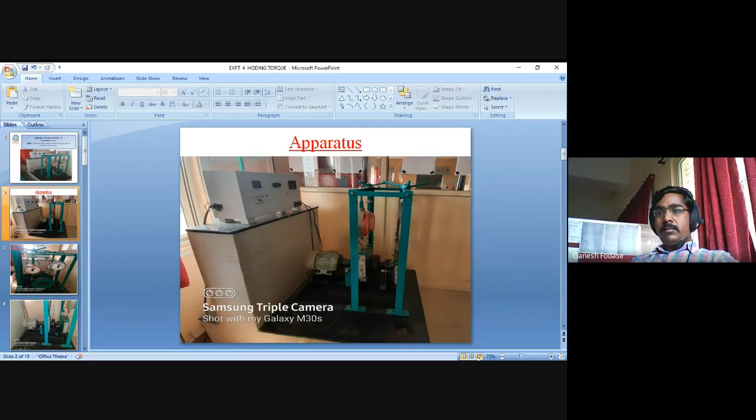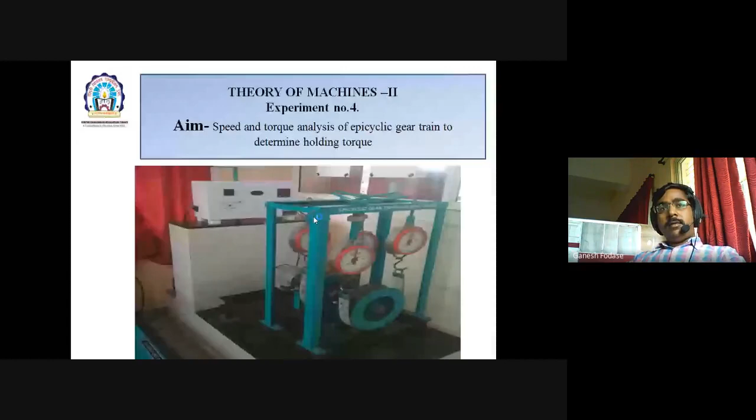Today we'll discuss a practical on epicyclic gear train. The aim of the practical is speed and torque analysis of epicyclic gear train to determine holding torque.

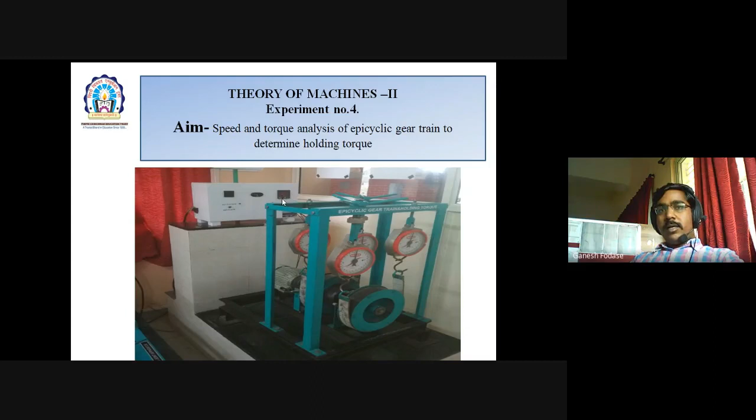This is our setup. It consists of different parts like a display. Other parts I will show you in next view. This display is there to show you or to obtain readings like RPM, voltage, current, and there is input and output switch.

This is side view of the setup. I already told you this is display. Here it consists of a motor. These parts I will show you in more detail in one more view.

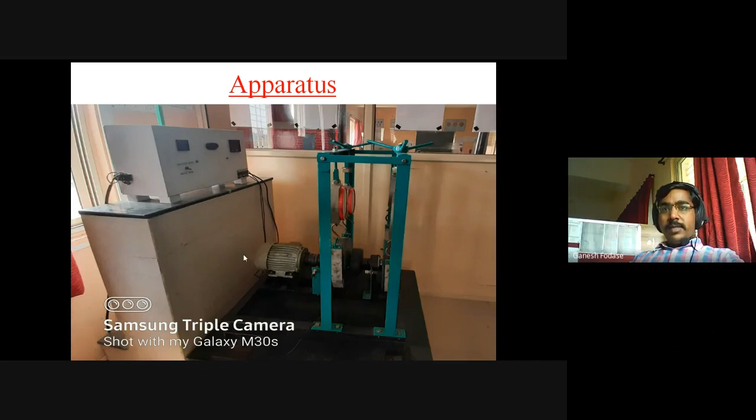This is front view of our setup, and in this front view it is clear we are using two pulleys. Let's say this will be a pulley mounted on ring gear shaft or output shaft. This is carrier pulley which is connected to two arms on which planets are rotating. So this is planet carrier pulley and this is output gear pulley.

On this pulley is rope brake dynamometers. You can see these spring balances. These rope brake dynamometers are used to determine torque acting on each pulley. So this is front view.

In side view, now I will show you each part in detail. The power is transmitted or given by motor through motor to sun gear. You can see this is our epicyclic gear train.

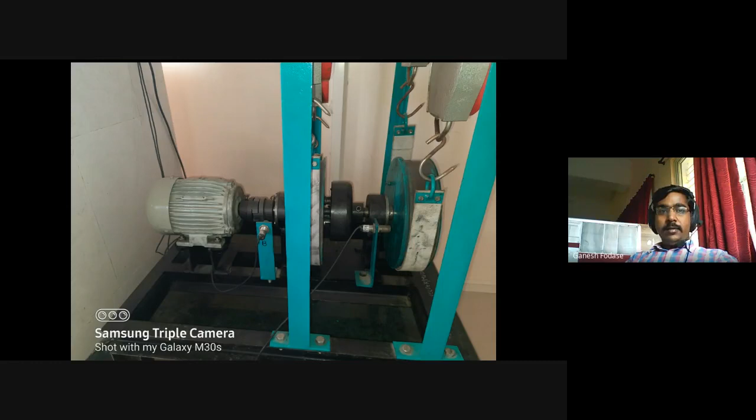So here it is, this will be a epicyclic gear train. Inside this there is epicyclic gear train. At the center there is sun gear, and around the sun gear two planets are there, and these planets are in mesh with this ring gear.

So you can see this sun gear shaft. This sun gear shaft is connected to motor through coupling and bearings. This is coupling and this is a bearing to support the shaft, while coupling is used to connect the motor shaft with a sun gear shaft.

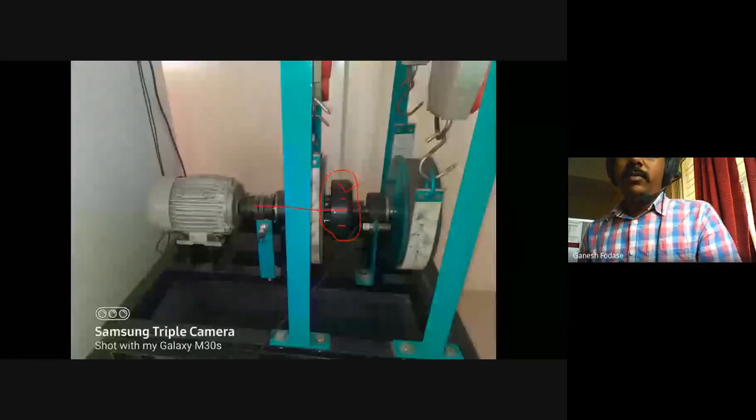Now you can see here from this planet carrier or from this epicyclic gear train, three shafts are coming out. So here it is, one shaft. You can see this will be one shaft. Another shaft is here and one more is here.

So the central shaft is sun gear shaft. These two, I'm saying these two, this one and these two are the arms on which planets are rotating. And these two arms are connected to this pulley.

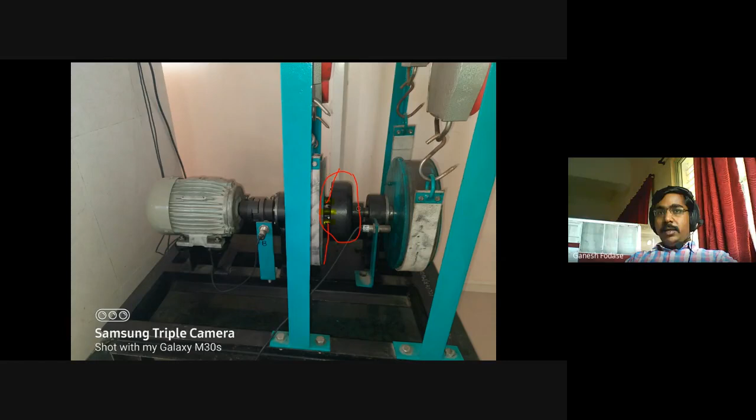In this pulley, you can see in the side view, in the front view, this pulley is connected to two arms which are shown here. So if these arms are rotating, these pins are rotating, which is rotated by sun gear. If they rotate, this pulley also rotates. And if this pulley is held stationary, means these arms are stationary, then power is transmitted from sun gear to planet and planet to ring gear.

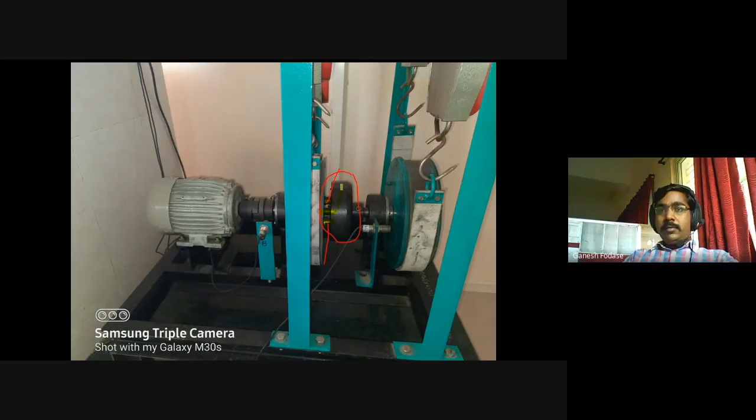So this is our ring gear. This black color outside portion is a ring gear portion. So this is our ring gear, and you can see this ring gear is connected to output shaft with the help of this arrangement. So ring gear is connected to output shaft, and on output shaft there is an output pulley.

So this is the input from motor. This is output connected to ring gear, and this is planet carrier connected to arm. Now if we can fix any one of this element, that is either ring gear or arm, so if I fix this planet carrier by fixing this pulley, so to apply load on these two pulleys.

Arrangement of rope brake dynamometers is used. You can see the spring balances. So we can apply load on this pulley as well as this pulley by using this. With this lever, we can arrange load, we can apply load on these pulleys, that is either on planet carrier pulley or output pulley.

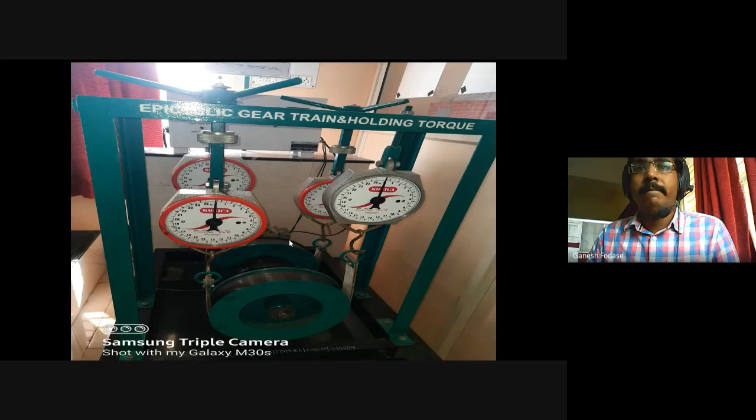So this is all a setup. Now what this epicyclic gear train consists of in detail, you can see at the center there is sun gear, and around there are two planet gears, where these two planets are meshing with ring gear. This is also a schematic diagram I drew.

Motor current transmitting power to sun gear through input shaft, in between coupling and bearing is there. Bearing is used for supporting the shaft, while coupling is used to connect the motor shaft with a sun gear shaft. Sun gear mesh with planets.

There are two planets, and these planets are rotating over a pin, and these two pins or arms are connected to a planet carrier pulley, while this internal gear is connected to output shaft. A bearing is there to support the shaft, and over that output shaft, output pulley is there. While spring balance arrangement, the rope brake dynamometer arrangement is there to calculate the torques.

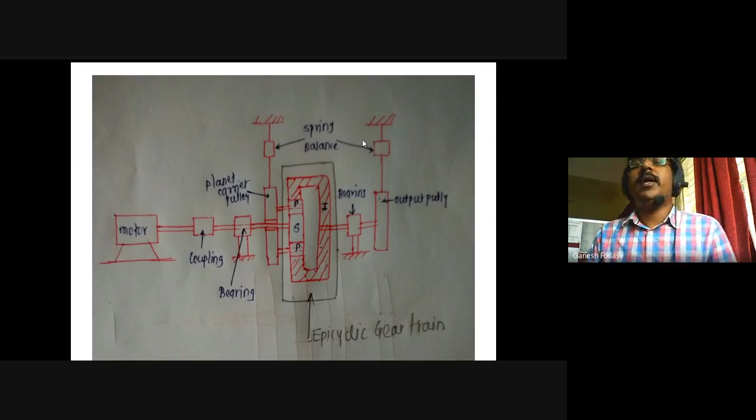This is our overall setup. Now, what theory is required to analyze the speed and torque?

We must know in epicyclic gear train there are three types of torques basically: input torque, output torque, and holding torque. We can say the element which is held stationary, the torque acting on that element is called holding torque. So there will be input torque, output torque, and holding torque in a epicyclic gear train.

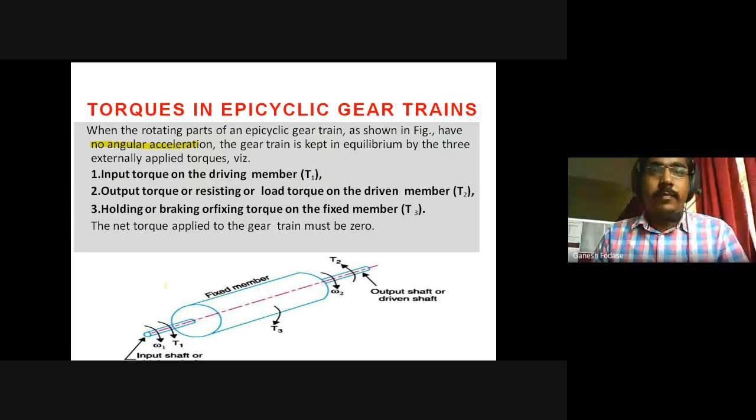And if you assume that all these elements are rotating with constant angular velocity, means there is no angular acceleration, then we can write the net torque acting on this gear train must be 0. So if these elements are rotating with constant angular velocity, then net torque will be 0.

External torque will be 0. Hence our equation is T1 plus T2 plus T3 is equal to 0. This is one of the important equations for torque analysis.

Another assumption is that we neglect friction. So if we neglect friction, the net kinetic energy dissipated by the gear train must be 0. Hence one more equation: T1 omega1 plus T2 omega2 plus T3 omega3 is equal to 0. But since the third is a fixed element, omega3 is 0, and hence our final equation is T1 omega1 plus T2 omega2 is equal to 0.

That is, input power plus output power is equal to 0. We can also write input power is equal to output power. So with equations 1 and 4, we can analyze epicyclic gear train problems. This is about torque analysis of epicyclic gear train, theory of torque analysis.

One more interesting thing here: by using equations 1 and 4, we can write T2 in terms of T1, and T3 in terms of T1 and T2. We can see this equation here.

If the angular velocity of input shaft and output shaft, using 1 and 2 for input and output, are not equal but in the same direction, then torques acting on input shaft and output shaft will be in opposite direction. While if the angular velocity of input and output shaft are in opposite direction, meaning having a negative sign, then this will get cancelled, so torque in that case will be in the same direction.

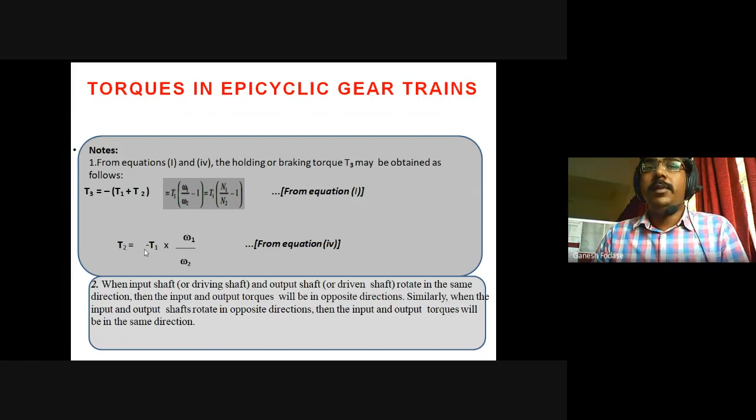I already explained the setup, but we'll see the specifications. The sun gear has 14 teeth. There are 2 planetary gears, each carrying 21 teeth, while the internal gear has 56 teeth. These 2 pulleys have a diameter of 260 mm with a 6 mm thickness belt.

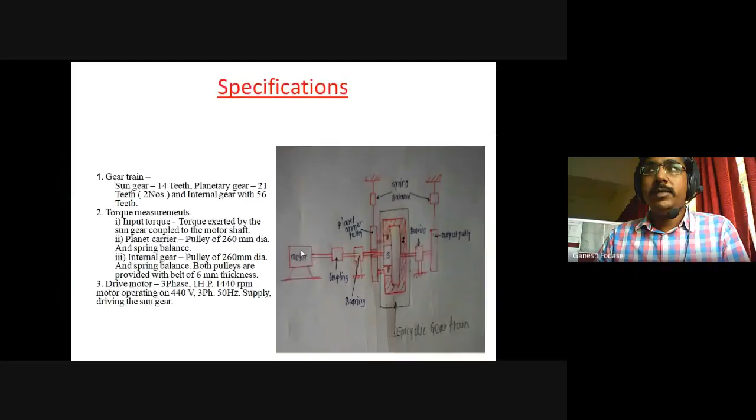This motor is 1 horsepower and there's a 3 phase motor. These are all the specifications of this epicyclic gear train.

What precautions do we have to take? Different precautions, like we should not load this motor above 1.9 ampere. Before starting the experiment, we should provide proper lubrication to all gears and bearings. And one more thing: when you turn the switch on or off, at that time the load on both pulleys, that is input pulley and output pulley or planet carrier pulley, must be 0.

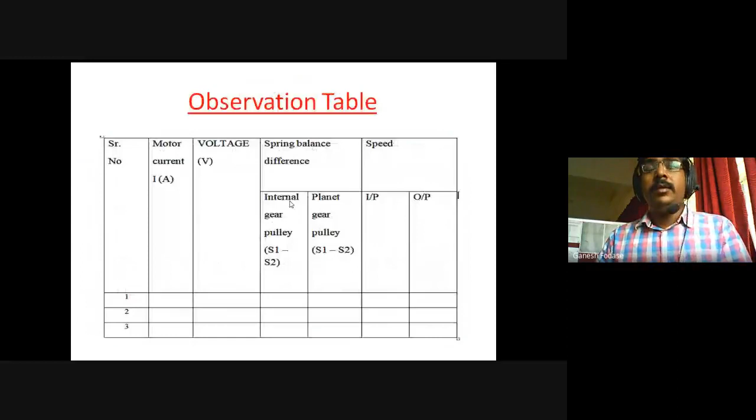Another precaution I will explain in the demonstration. Now, what do we have to find out? We have to find input torque, output torque, and holding torque.

For finding input torque, we require the torque acting on the sun gear. So for sun gear, input power is equal to 2 pi NT, or power is equal to 2 pi NT by 60. So torque is equal to power into 60 upon 2 pi N.

The basic equation is that V into I is nothing but power. So input power is equal to 2 pi NT upon 60. So to find out input torque, that is torque acting on sun gear, I require voltage and current to find out power, and RPM of the input shaft, as well as to find the torque on the planet carrier.

As I explained, the rope brake dynamometer is used. So here it is basically the spring balance difference of the planet carrier into 9.81. Why 9.81? Because this difference is in kg, multiplied by radius. The radius, as I already told you, is 260 mm diameter pulley plus 6 mm thickness.

So both side thickness is 12 mm, so it is 260 plus 12. Likewise, the net force, that is net spring balance difference into radius, gives you the planet carrier torque. Similarly, spring balance difference of the internal gear into radius multiplied by 9.81 gives you the internal gear torque or output torque.

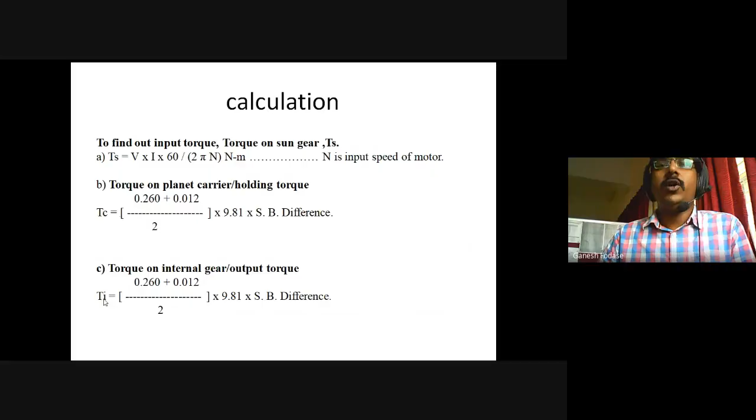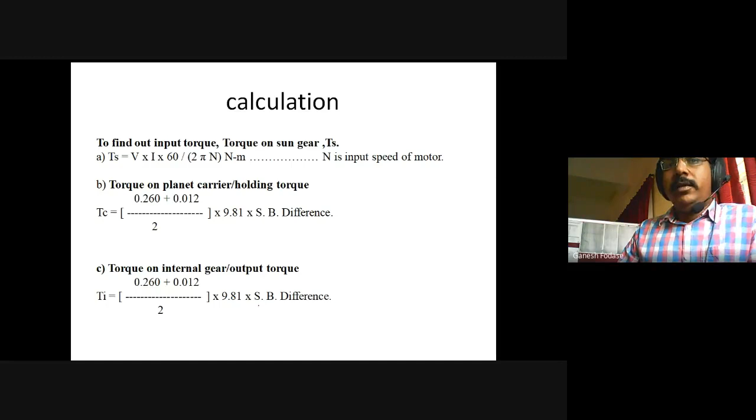So to find output torque, holding torque, and input torque, we require spring balance difference on the planet carrier, spring balance difference on the internal gear. Dimensions are already known, radius and thickness of the belt is known, as well as we need to find V and I, the input power, as well as input RPM.

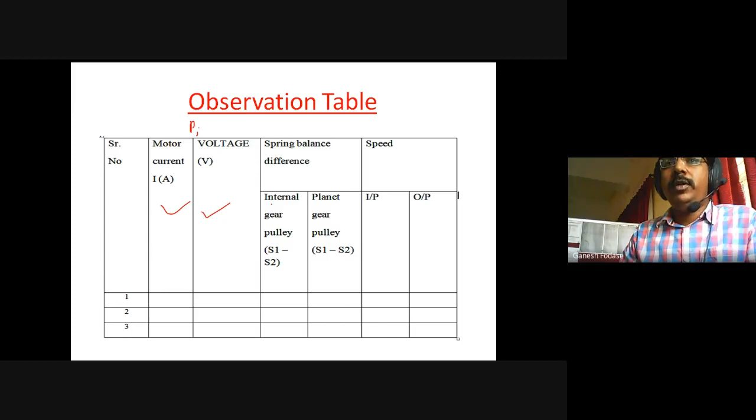And for this, our observation table is input power. To find input power, we have voltage, and we have to find voltage and current supplied to the motor. Then spring balance difference to find torque on the internal gear pulley and torque on the planet gear pulley. At the same time, we have to find input speed and output speed.

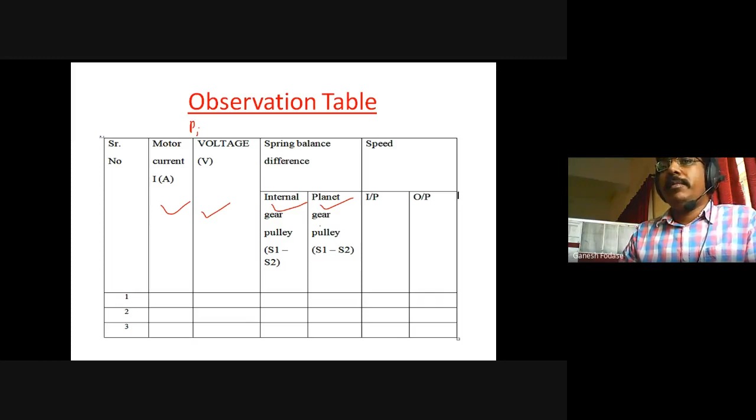So if we find the spring balance difference, then multiply by radius, we'll get torque on the internal gear pulley. Spring balance difference multiplied by radius gives torque on the planet carrier pulley. And the element which is stationary is called holding torque; the torque active on that element is called holding torque. So we can find holding torque, input torque, and output torque.

Thus, we are able to do torque analysis of an epicyclic gear train. A detailed demonstration is explained in the next video.

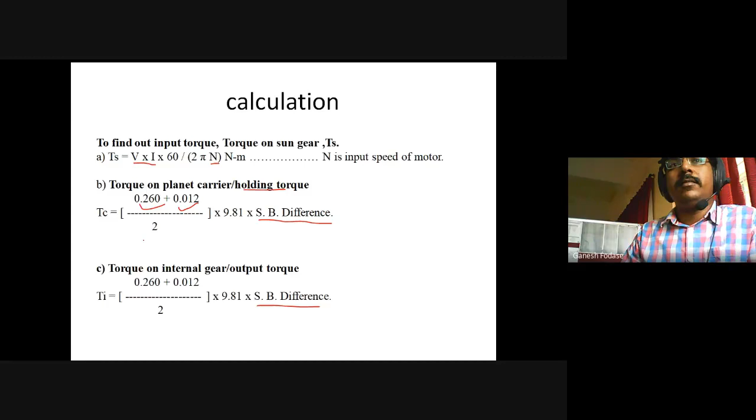So this is all about the theory of speed and torque analysis experiment to determine holding torque.